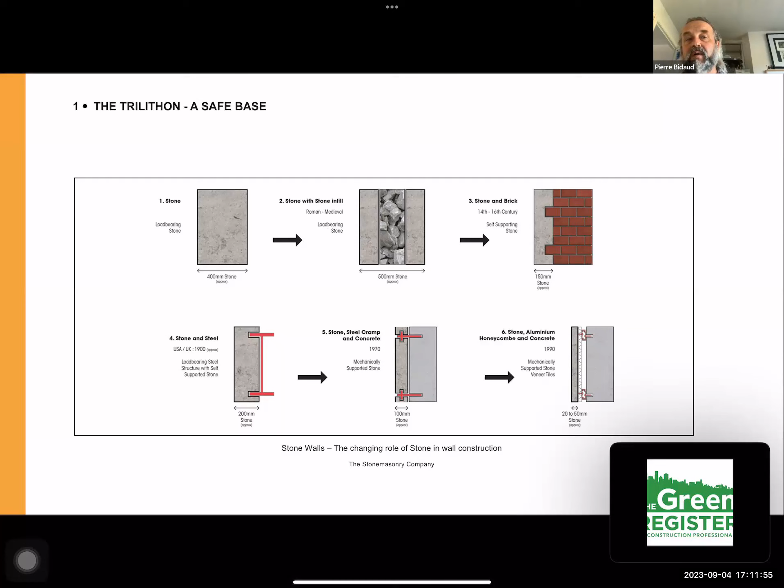So I think it just shows how the way of building has been driven by energy use, and how the more energy we have, the cheaper it became, and the more wasteful we became.

I don't know if, like me, you've become addicted to carbon footprint illustration grids and vignettes, but rarely will you see stone appearing on those illustrations. It's always missing — whether it's a pyramid of carbon usage, or any illustration of different materials in the construction industry, stone rarely appears, and if it appears, it's always as a cladding.

I'm afraid I've got to draw a comparison with where we are at the moment and France in 1945, just after the war. Why? Because I think what we have to deal with nowadays is very similar to the crisis of 1945 France: we've got less and less qualified labor that we can rely on, which was the case in 1945 and very much now.

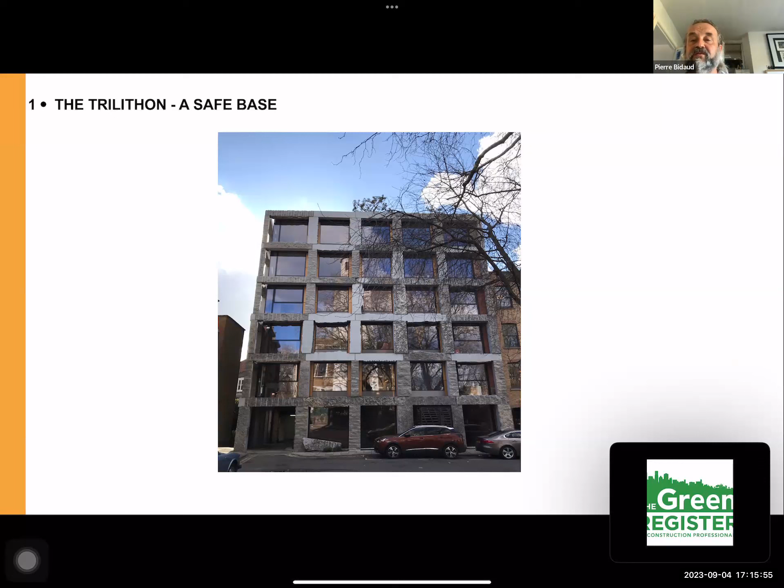Through the short study I'm going to show you about 15 Clerkenwell Close by Amin Taha Group work in 2016, you will be able to see that we managed to resolve quite a lot of those conundrums. Again, all that based on a very simple way of building and very much a safe way to build.

I'm going to show you a couple of typical quarry layouts. My colleague from south of France will feel insulted if I say this, but a very bland and easy quarry to stone is quarry, stone from Estaillade. As you can see here, it is very much like cutting sugar cubes out of the earth. Those blocks, depending, are 1.2 high by 600 mil thick or 400 mil thick, and nearly 1.6 long. So those blocks are going to be used straight from the quarry, put onto the back of a lorry, and sent straight to site to build.

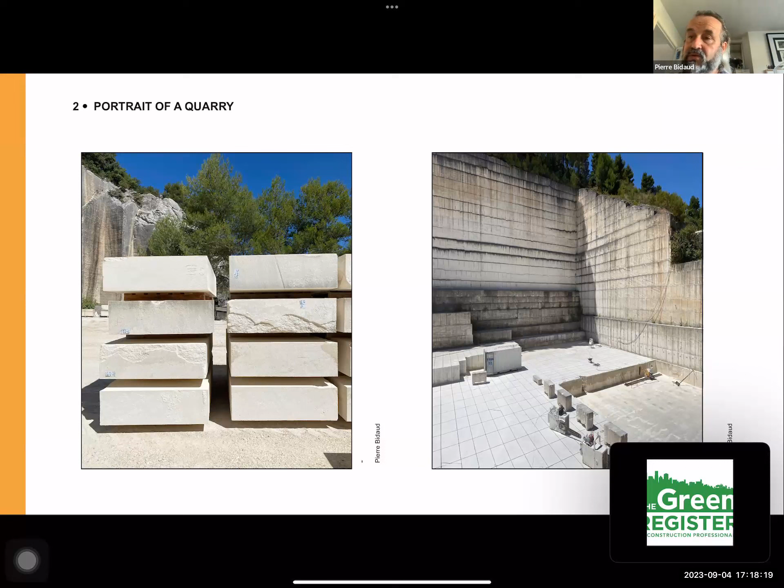In fact, you have already a prefabricated part of a wall right straight from that very bland and boring quarry. Again, do not repeat that to my friend from Provence. And of course you've got the very hard to get, very capricieuse, as we say in French, very demanding, very beautiful marbled limestone from Italy.

As you can see here, it's a completely different type of quarry. It's really a quarry where you are going to struggle to get your stone. You've got to have those massive wire cutter systems that you can see here. This big wheel just turns at high speed a very 10 millimeter diameter wire that's going to cut through the stone, and you are going to get pretty different blocks from one day to the other. They are not going to be a really homogeneous kind of block, and it's also a very hard limestone to cut. As soon as you see a diamond wire on a quarry, the stone is usually meant to be very hard.

And of course, you've got the very discrete, extremely discrete quarry, which you cannot even see because it's underground. You've got two of those quarries in the UK, which are of course Bath stone and Portland stone. Here it's a quarry in north of France, where we've got a lot of those quarries. When I say it's discrete, of course you cannot see it at all. They are usually just 10 meters underground, and due to their geological makeup, they are extracted in blocks of a very standard and normalized size, because the machines used are going to be extremely efficient in the way they extract the material.

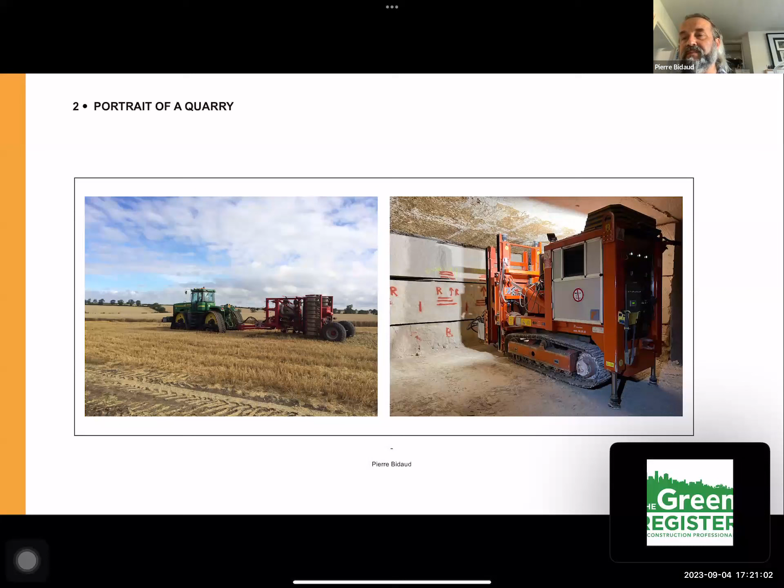What's happened is that, like in a coal seam, you are going to have a limestone seam under the ground, and you are going to follow its height. Some will be extremely shallow, like this one, which is just 2 or 2.5 meters, or you can get much higher ceiling height. If you go to Portland, it's really huge.

And of course, you've got to read a quarry. You've got to understand all its cracks, all these layers. Some quarries in the south of France, or in Spain or Italy, have been used since the Romans. So there is a huge amount of knowledge on the way you've got to behave with that quarry.

It's about reading really what the Earth has been cooking for us over the last million years, and it's going in between cracks, between seams, that a good quarryman will manage to get as much stone as possible.

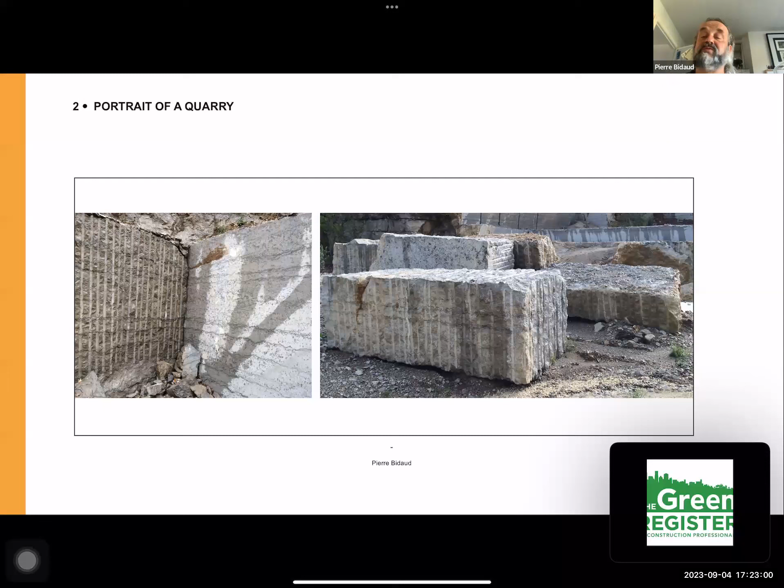I cannot tell you the amount of work that would have been done by hand 100 or 120 years ago. Nowadays it's just more or less semi-automated. The rigs that drill are automated. The quarry industry, the extraction industry of dimensional stone, has improved a lot.

And of course, most of those quarries have what we call beddings. A bit like wood has got all these layers, these rings, stone has been shaped.

Jurassic limestone has been created by organic matter gathering at the bottom of the ocean, or lakes, or whatever. And you've got to be very careful in the way you are using those beddings.

Sometimes people would think that those beddings need to be put back into compression, so that the pressure has got to be perpendicular to the bedding. But you will see, strangely enough, in some vernacular architecture, a quarryman has decided to use it the other way around, which an engineer would say should not work like that. But strangely enough, for the last 600 years it has been working perfectly well.

So it's not that the quarryman is a risk taker, or the engineer is risk averse. It's just that we are still in the process of understanding why some stone can be worked against the bed while other stone cannot. Again, it's an intimacy that we've all lost - the architect, the engineer, even the stonemason - on the way to build with stone as a load-bearing material.

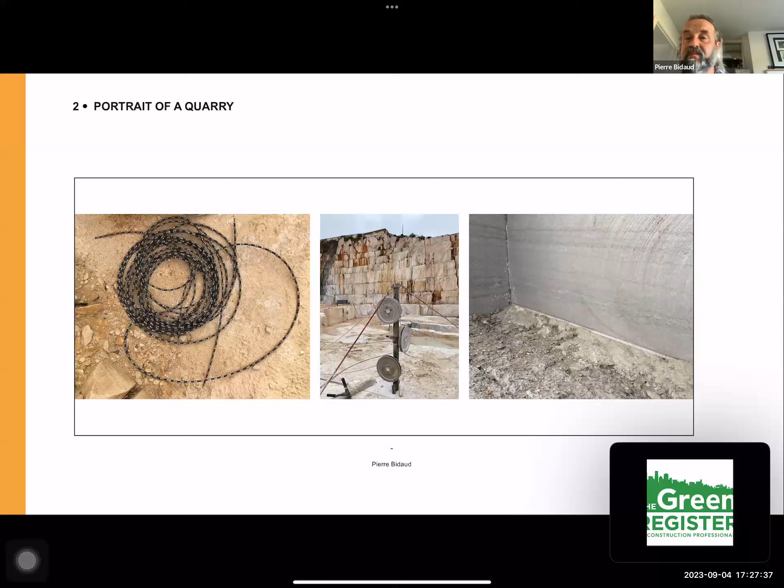So it's quite extraordinary, the advance in extraction that has been done in the last 50, 70 years, and even more in the last 10 years. Because something that has changed quite a lot of things in the quarry is that those big chainsaws you used to see only in workshops are now being mounted on special rigs, and can do the pre-cutting straight at the quarry, even carving straight into the quarry at a speed you would never have imagined 10 years ago.

And those machines leave some very interesting patterns, very much like the extraction tool marks of the Roman quarry master. Those marks in the stone are the contemporary marks of our modern tools, and should be celebrated as well, not always disappearing at the surface of the building.

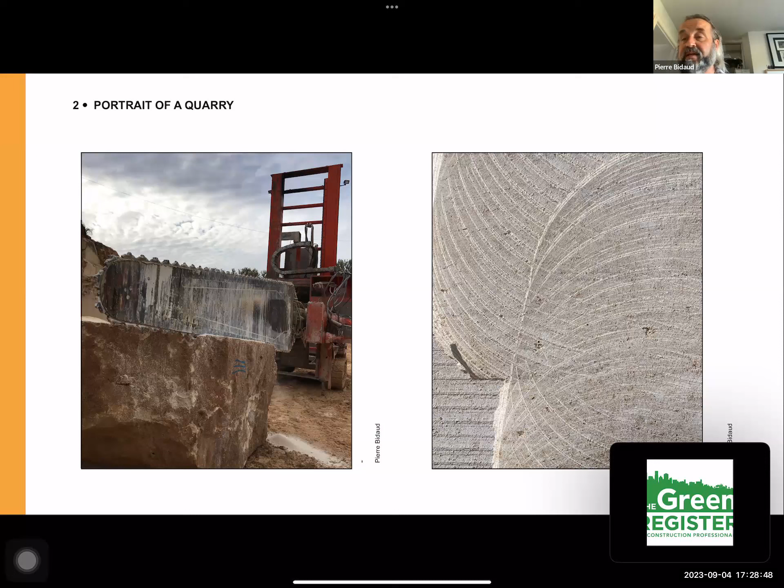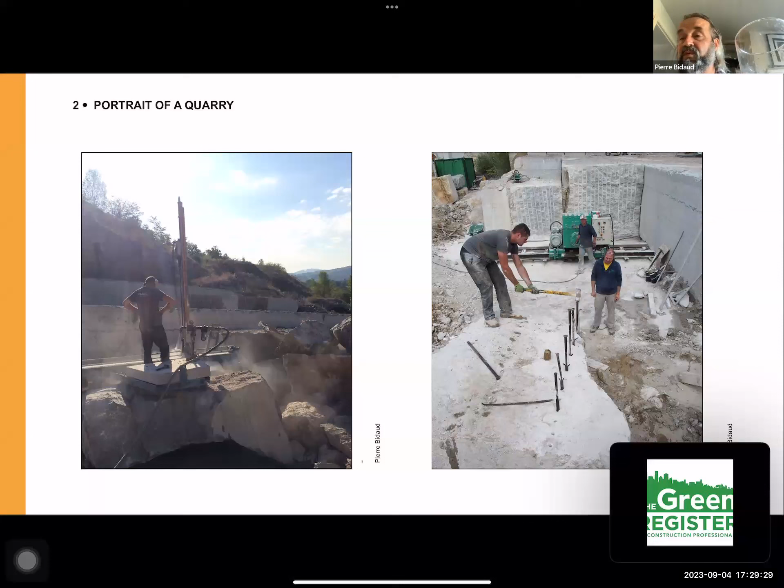Yes, again, it's a testament to the evolution of stonemasonry. Of course, the splitting in this particular quarry still needs to be done using plug and feathers. But if you were to go in Norway, they would have a complete automated rig that would do that with hydraulic jacks and no manpower on site.

And here you can see on the left-hand side that huge chainsaw cutting perpendicular to the bedding, in a horizontal cut, cutting the beds. These are easily transported on a digger or anything with tracks, and can be moved into the quarry or wherever you want. And there, Amin Taha on the left-hand side, and Dominic, both the architects of 15 Clerkenwell Close.

And I have to say that when you visit a quarry, when you walk on top of those giant blocks, you just feel like a conqueror, like you are walking on the plinth to your greatness. There is something special about visiting quarries and losing yourself in this labyrinth of blocks. Sometimes you could have 500 blocks like that in a quarry, and it's quite a poetic experience.

Now, once the quarry has done its job, you just need to go to the plant, the stone yard, to have it cut for installation. And yes, being French, I always like to put a bit of French philosophy in. As Descartes said, 'I think, therefore I am.' So I carve, therefore I am. And it's something I have enjoyed for a very long period of time while I was on the tools.

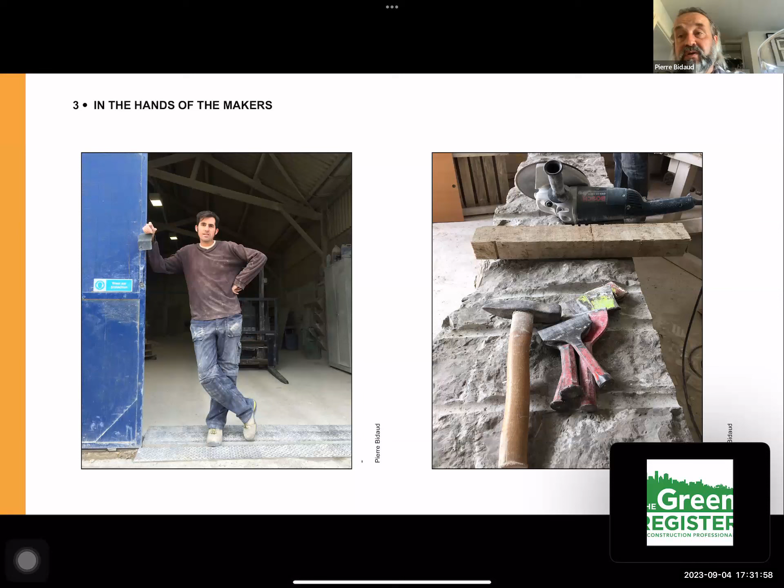But the job you've seen at Clerkenwell has been done by only one man, Régis, who happened to be my apprentice in '93 in Marseille. Régis, who is now a sculptor also, did all the cutting for the connection boxes for the Clerkenwell project, and very simply with a disc cutter and some chisels, he did most of the connections on the 100 cubic meters of stone.

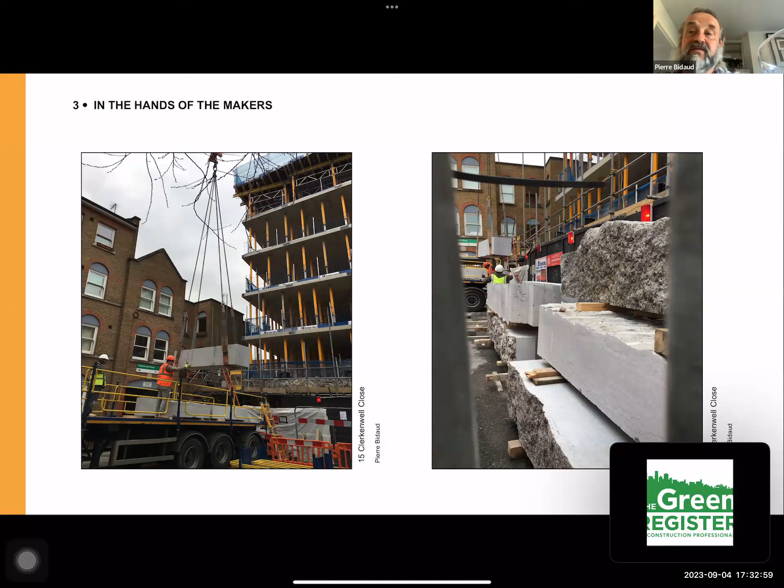One of the challenges was obviously the tight space on site at Clerkenwell, and we just had to rely on a very short chain of supply, where all the lorries were coming at a certain date, very much like a precast concrete system, one lorry at a time every 2-3 days, store them quickly on site and just erect the structure. Again, very, very close to precast concrete. So here you can see on the left one of the pillars being lifted up in the air.

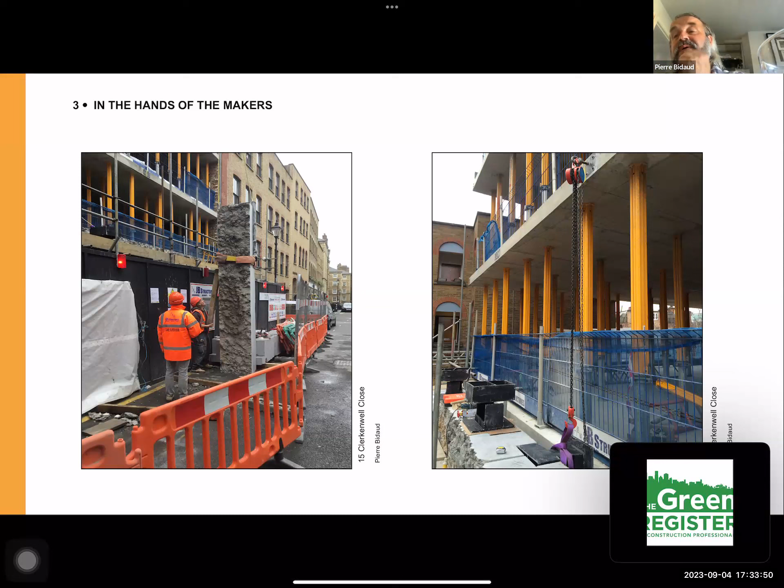Those pillars, as on the right-hand side pictures, you can just see. I'll show it later, but those massive pillars and lintels are taking the load of each concrete floor. So the structure at Clerkenwell Close is very much a load-bearing stone structure. The whole building is connected to that exoskeleton, and this exoskeleton is fully load-bearing. What you can see here is the connection on the left-hand side of pillars and a lintel, and on the right-hand side the connection box that's going to be connected from that exoskeleton to the concrete floor.

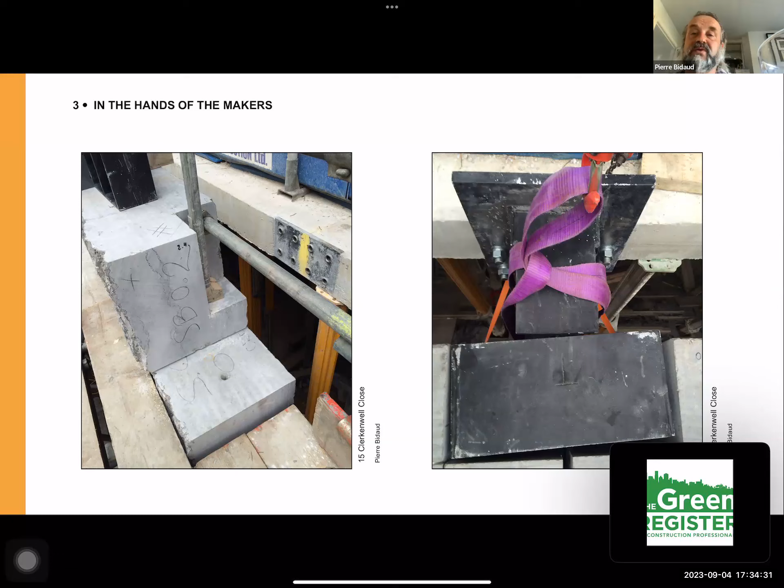I think with the Finsbury Square building by Eric Parry, that's a very rare stone structure in the last 20 years that has been fully load-bearing. On the left-hand side pictures, you can see that female connection box being cast into the concrete.

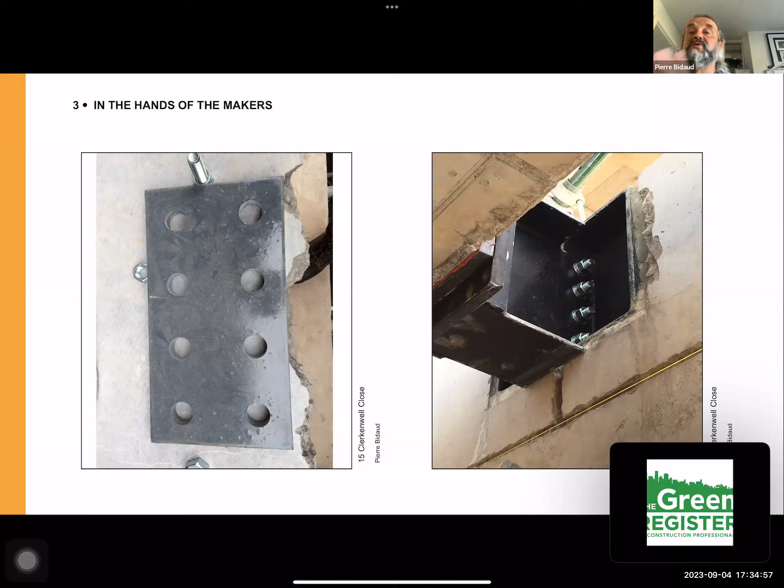To avoid any cold bridge, we inserted between the concrete floor and the back of the stone of the exoskeleton a foam glass element to stop that cold bridge.

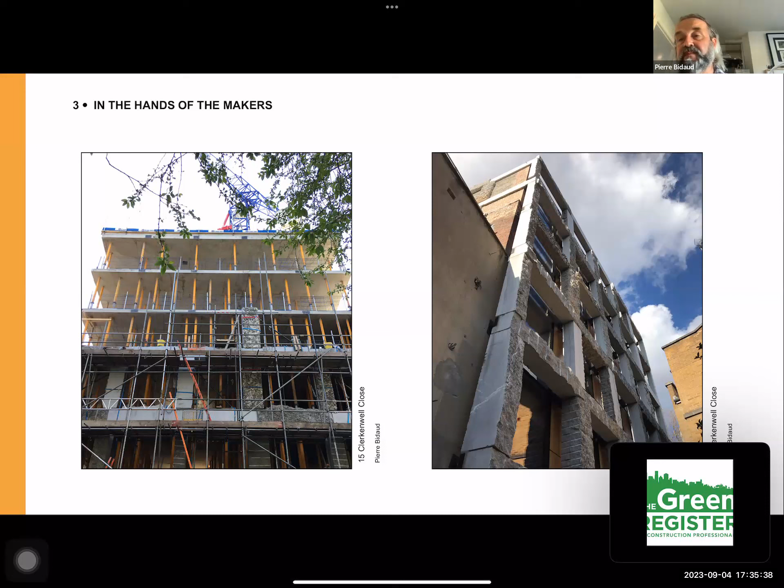As much as you need an architect and a stonemason, you of course need an engineer. In most of our projects, the stonemasonry company and team try to be very close to the engineer on site — in this case Steve Webb — and the architect.

Those stone projects at the moment demand a very close partnership, a very transparent partnership between these three people on a project. It's very much recommended that the choice of stone is made quite early in the project, so that you can be as efficient as possible in the use of carbon, in the way you use stone, and in the style, module and pattern you're going to use for your building.

Return to the future. Those elements you saw earlier were just monolithic lintels and columns. What happened is that stone is a natural material, and it's got faults, cracks, and so on. Over the last 6,000 years, through engineering, through efficient extracting and efficient shaping, we've managed to sublime a material which is, of course, flawed.

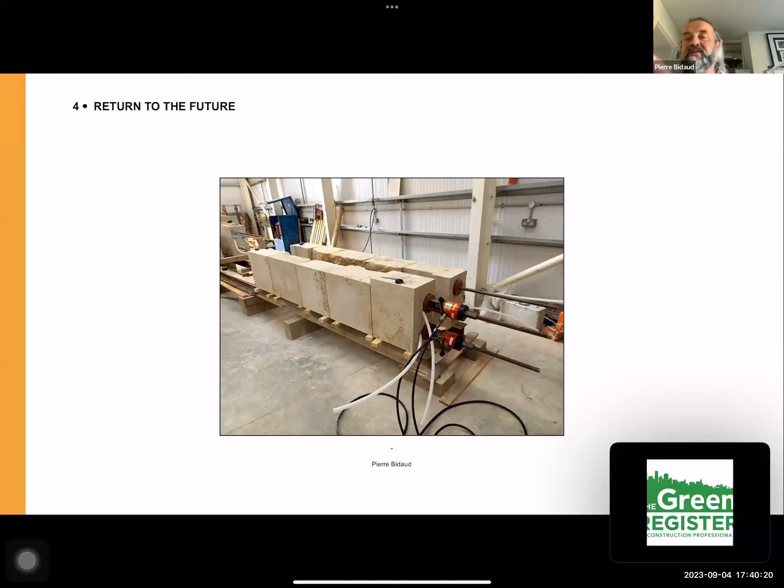We just use a standard stressing system. When I say standard, the system is standard, but the process is far from being standard. We have spent a lot of time improving those systems, and now we issue, day in and day out, up to 14-meter long stone beams or planks.

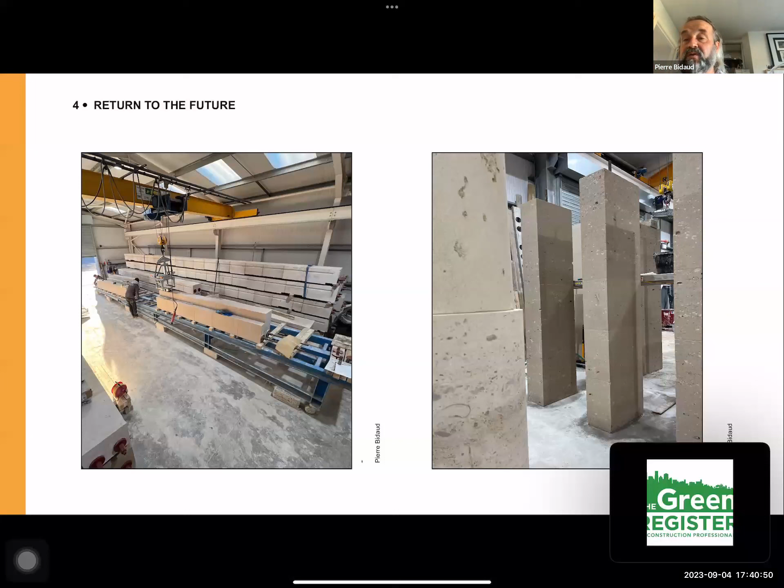We do the same with columns, all prefabricated to speed up the process of setting on site, so that we don't have to hand set stone blocks like in the old days. Unfortunately, at the moment we do not have the labor force, and we are under time constraints, so we just need to move fast on site.

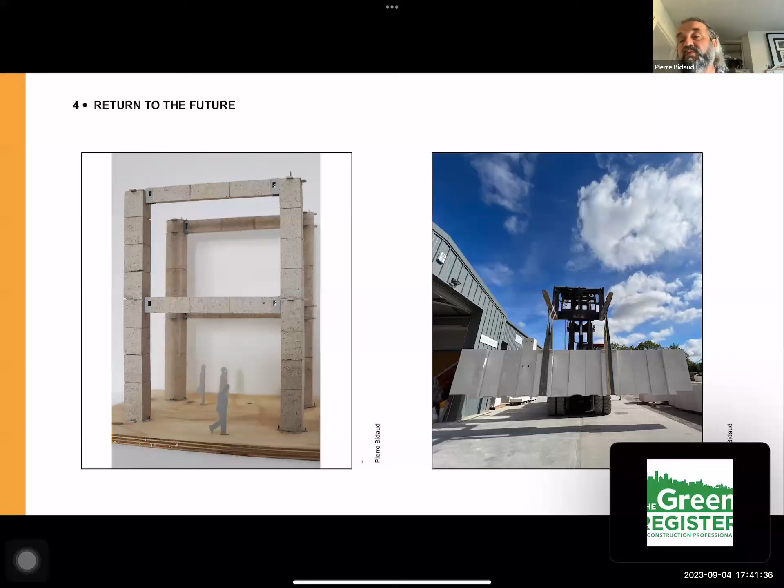On the right-hand side, you can see one of these huge transfer beams that we put on a project at the moment, which is as reliable as a large piece of concrete.

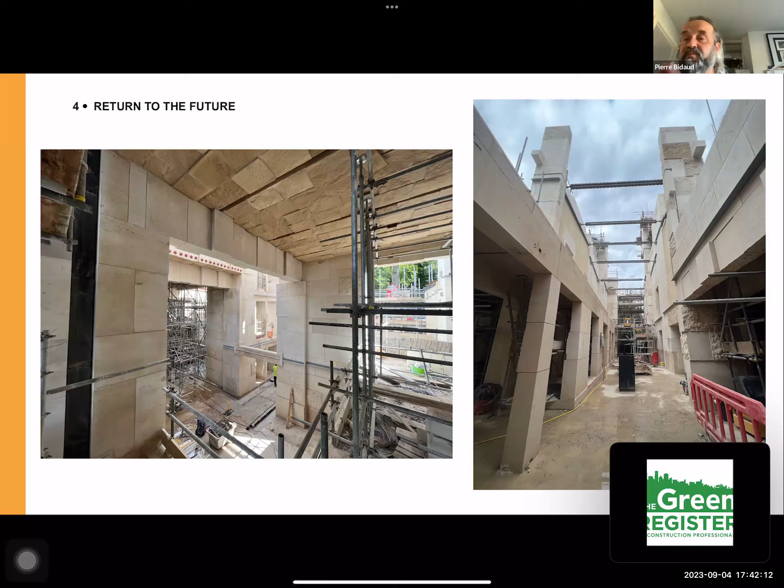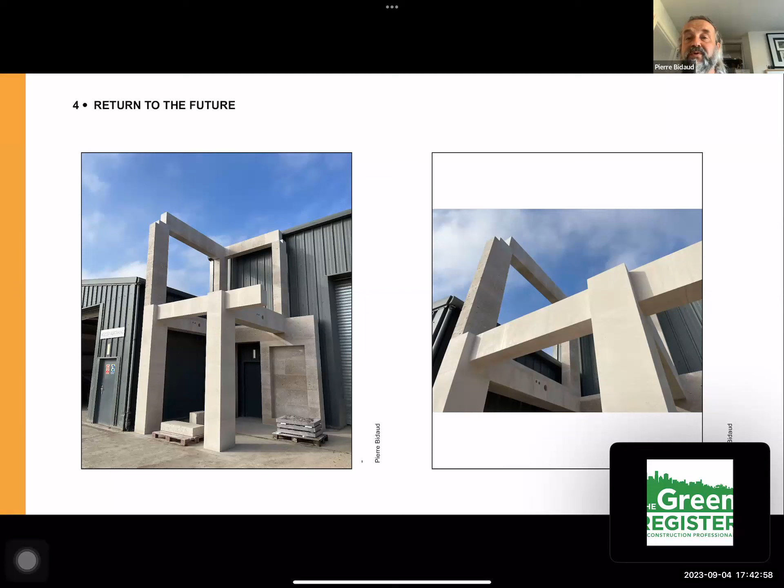We very much do not want at the moment to disrupt the method of construction. What we want is to challenge the use of material for those structures, but not the way they are built together.

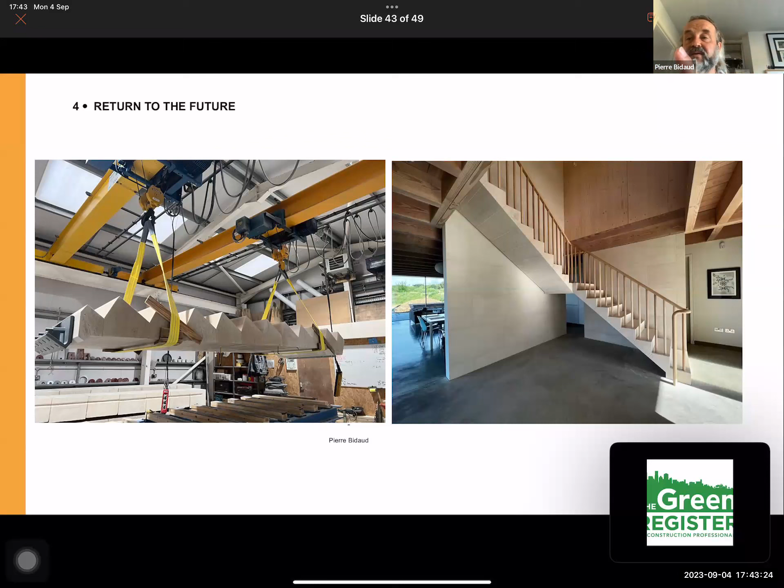Something that was key to us for the last 15 years was the building of reinforced stone staircases. That was usually done on site, hence the name post-tension, because we were doing the tensioning on site of those staircases. But now, with our new technology, we even do them pre-assembled, and those staircases have been used for the staircase on the left-hand side and the right-hand side, which we couldn't have embedded into the wall, so we decided to just do a pre-assembled one.

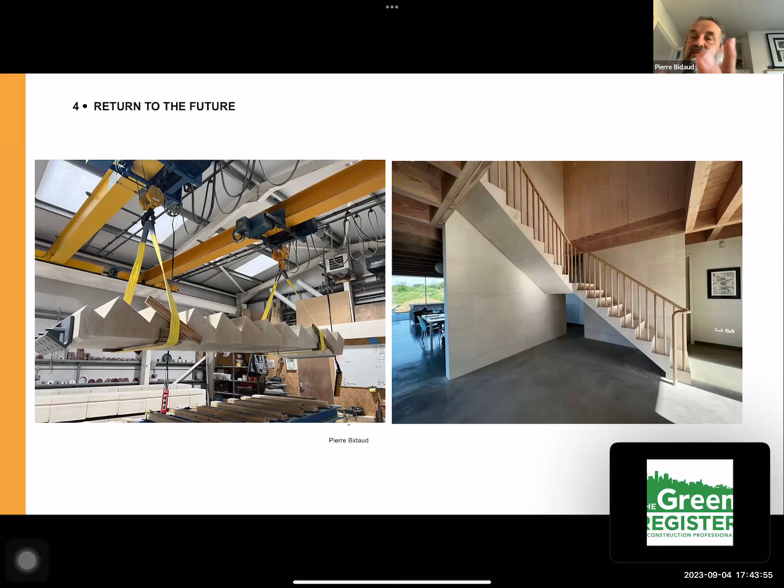That's a very interesting job where we did all the spine walls in load-bearing stone, and the ground floor and part of the first floor was all in wood. So a nice stone plinth at the bottom, and then the wood at the top.

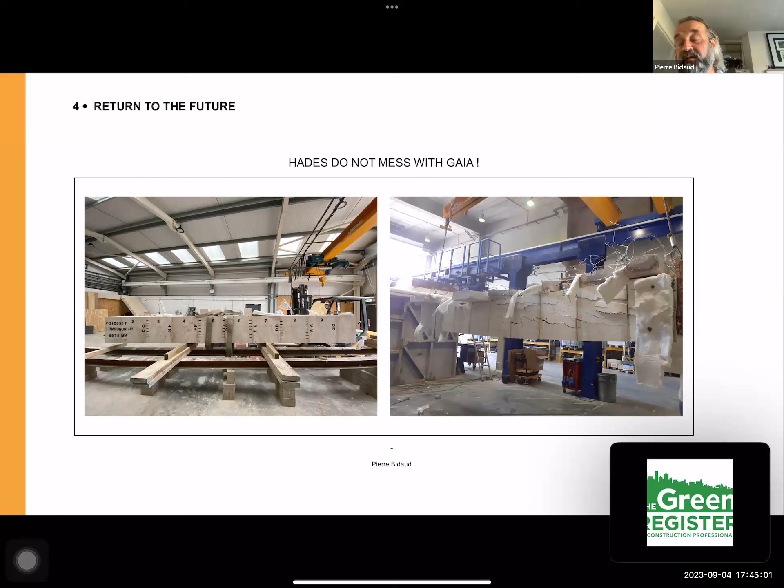As you can see, very little spalling, an incredibly well-behaved stone beam, which just shows that stone beams in this sort of configuration are as good as concrete beams. I think that's a big lesson to learn. We didn't just do one test, but two, and even three, with the same result.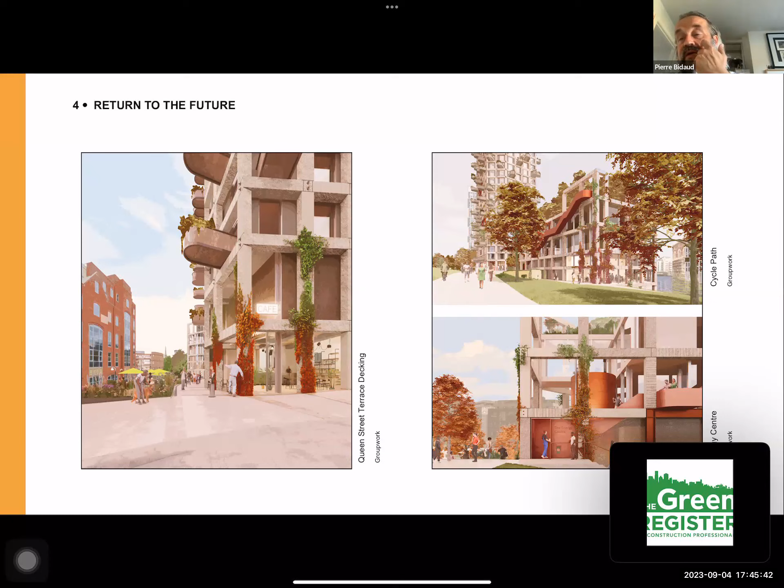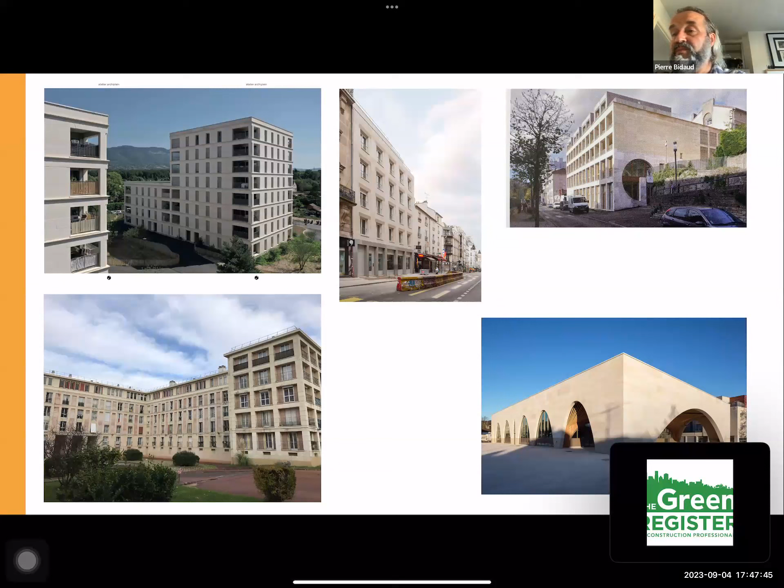No reinforcement whatsoever. All those pictures, by the way, are unreinforced, traditional unreinforced stone. And the lovely covered market has been done by our colleagues at Lada Studio in east of France. Again, a beautiful box of load-bearing stone.

There are so many other buildings that could be built with stone. We just need to put the right argument across. I think that is something we need to think carefully on, the way we are seeing stone. We just have to change the mindset of developers, engineers, and architects on how to use stone, because it's a material which has got so much more to offer than just bathroom tiling and shopping mall floor.

I think those buildings that I've shown you have got at least 300 mil thick stone walls. And as I tend to say, as my last lithography quote, any stone building is a quarry to be. So any solid building that you see that might have been built by the Romans, and then dismantled and rebuilt by the Gothic, and then dismantled and taken over by some Renaissance builders. This sort of perpetual use of stone can only be done if it's in solid state. If you are doing a 30 mil or a 20 mil cladding, you are never going to use that stone as it should be. I think it's something that circularity of the material is another big thing, and we've got to consider it with a lot more attention.